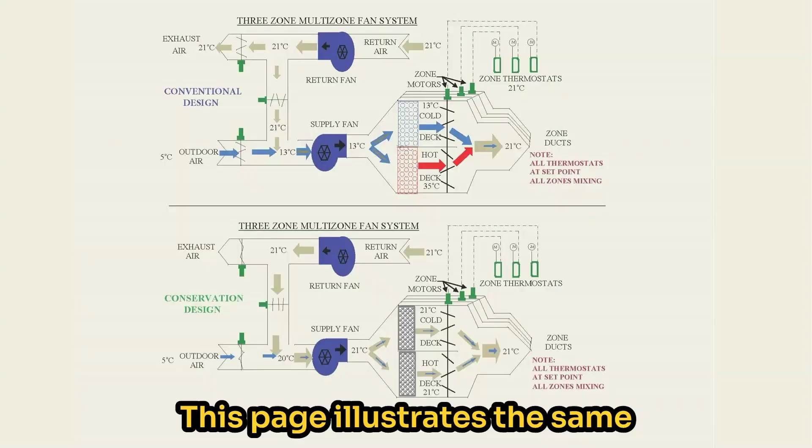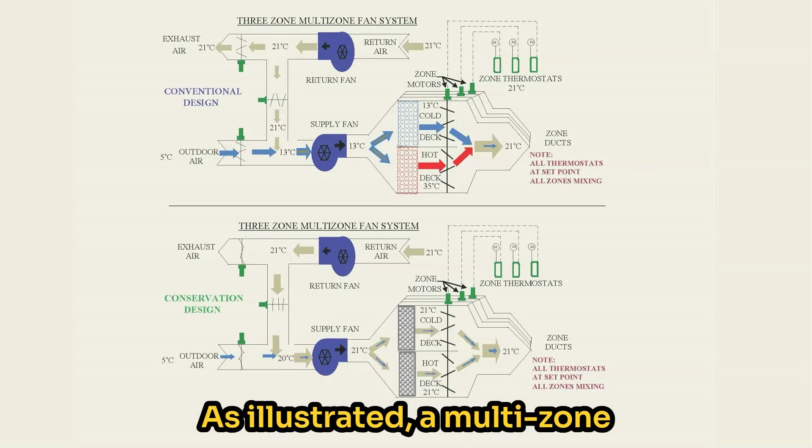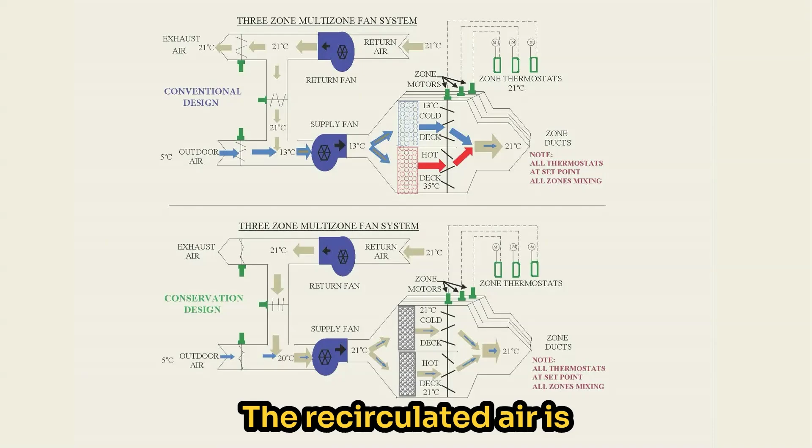This page illustrates the same multi-zone air handling system, with the conventional control design in the upper portion and the conservation design below. As illustrated, a multi-zone system has the ability to draw air back from the occupied space through the return fan. The return air can either be exhausted outdoors through the exhaust damper or partially recirculated. The recirculated air is directed back into the mixing plenum on the suction side of the supply fan, where it is blended with outdoor air.

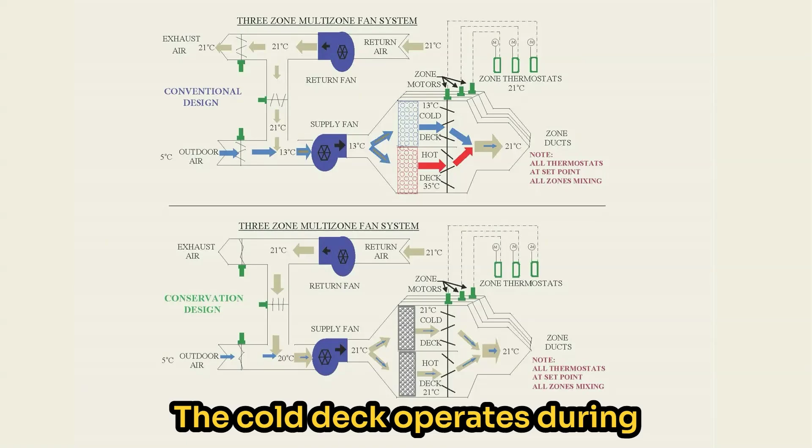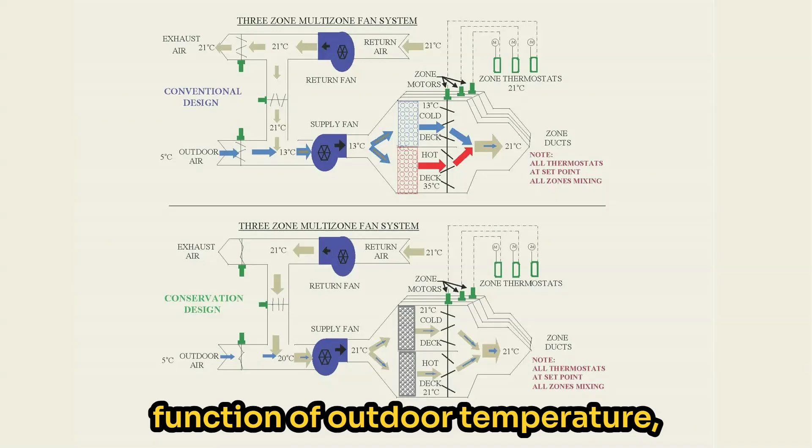In the conventional design, this mixed air is controlled to a fixed 13 degrees Celsius during cold weather, then discharged to the supply of the cold deck and the hot deck. The cold deck operates during summer when mechanical cooling is available, cooling the air to 13 degrees Celsius. The hot deck is activated during wintertime, and its temperature resets directly as a function of outdoor temperature, getting progressively hotter as outdoor conditions become colder.

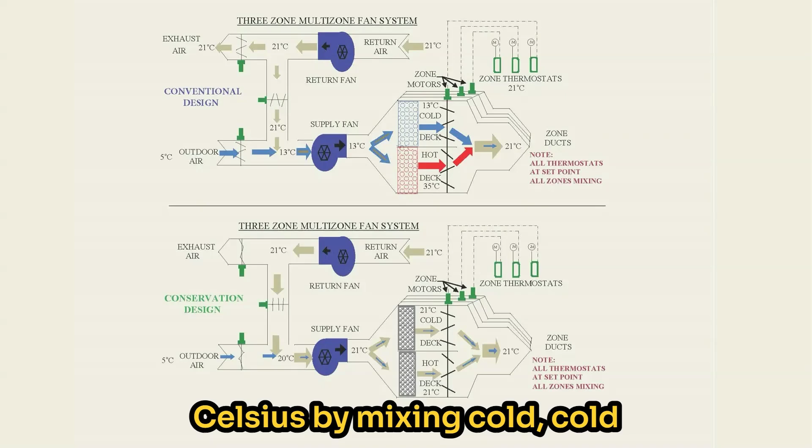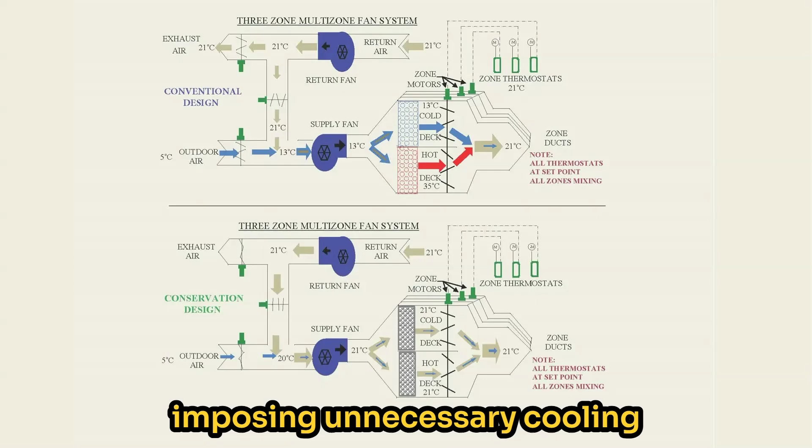At times, satisfied zone thermostats achieve the desired supply temperature, for example 21 degrees Celsius, by mixing cold deck air at 13 degrees Celsius with hot deck air. Ironically, this blended supply air is often delivered at roughly the same temperature as the air being returned by the return fan. In other words, if the system were just left alone without imposing unnecessary cooling from the cold deck or heating from the hot deck, it could have recirculated the return air, added only the minimum required outdoor air for ventilation purposes, and delivered supply air at approximately 21 degrees Celsius with no additional heating or cooling.

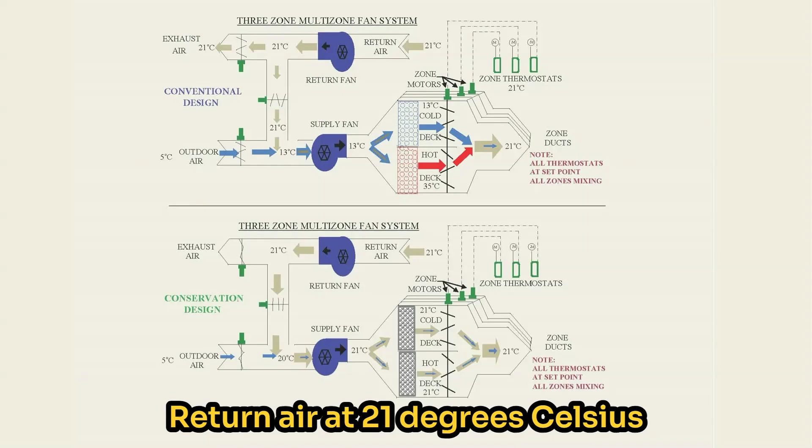The lower illustration presents this more logical control circuit. Return air at 21 degrees Celsius is fully recirculated rather than exhausted, with only the required quantity of outdoor air introduced to satisfy ventilation code requirements. In many cases, though not always, the difference between the supply fan and return fan volumes already equals the minimum outdoor air quantity.

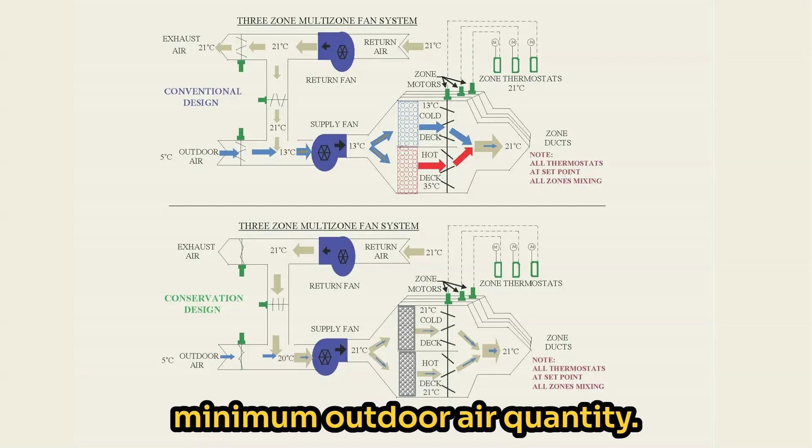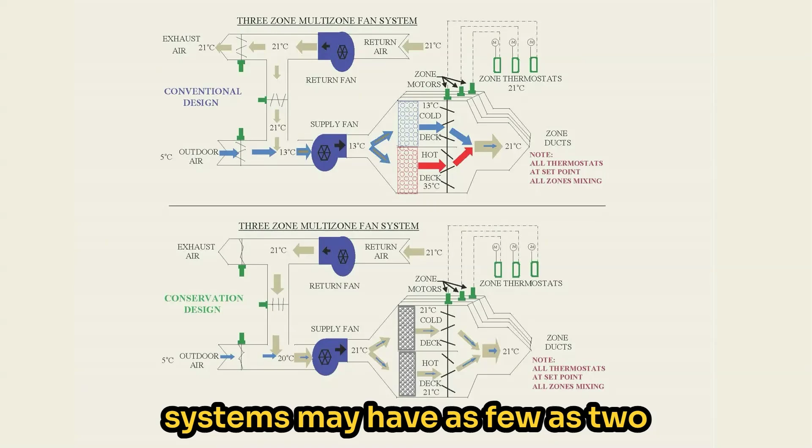The blended air is then discharged from the supply fan at approximately 21 degrees Celsius without the need for artificially cooling the cold deck or excessively heating the hot deck when all zones are satisfied. This example shows only 3 zone thermostats, but multi-zone systems may have as few as 2 or as many as a dozen or more. Regardless of the number of zones, the conventional system is inherently inefficient.

The conservation circuit injects some common sense into the circuit that minimizes the conflict between heating and cooling. The warmest zone can force the cold deck supply temperature downward once that zone has fully closed its hot deck damper and fully opened its cold deck damper.

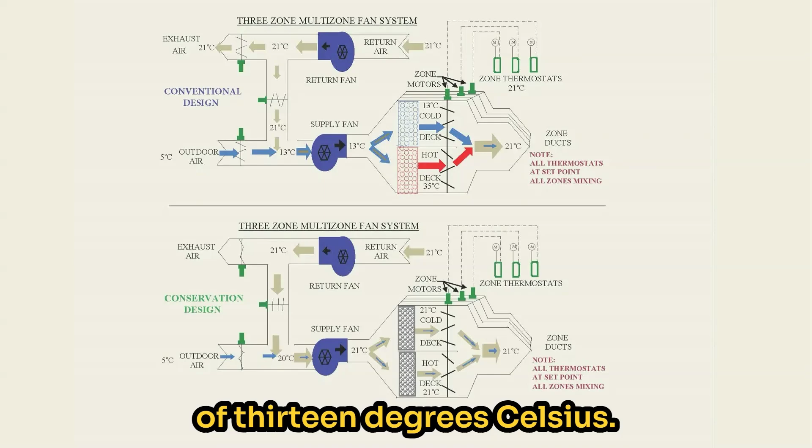The cold deck temperature can only be gradually reduced to the original design limit of 13 degrees Celsius. Conversely, the cold zone can force the hot deck supply temperature upward once its thermostat has fully opened its hot deck damper and fully closed its cold deck damper. The hot deck temperature can only increase within the limits established by the original hot deck reset schedule. This logic tends to minimize the temperature difference between the hot deck and the cold deck on a continual basis.

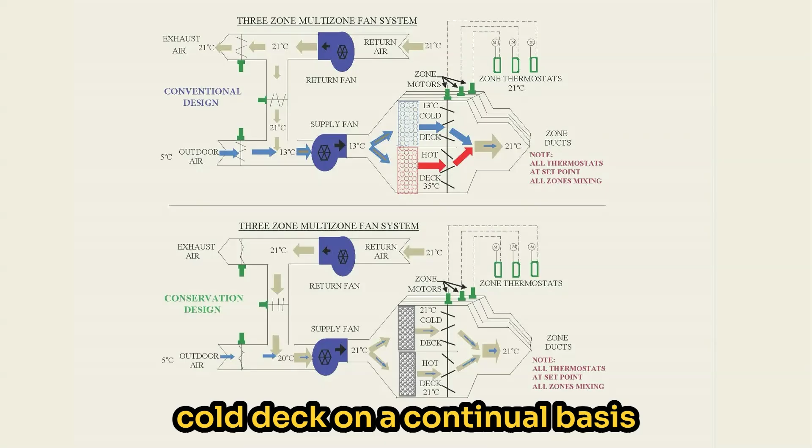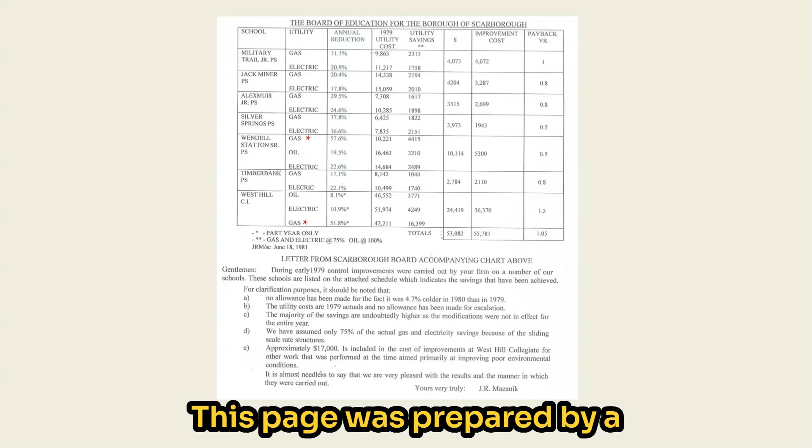The second image is from the Scarborough Board of Education, where their engineer calculated that we reduced energy in 2 of their buildings by more than 50%, and they had multi-zone systems in them. This page was prepared by a manager from the Scarborough Board of Education, indicating the reductions in energy we achieved on buildings that we retrofitted for them.

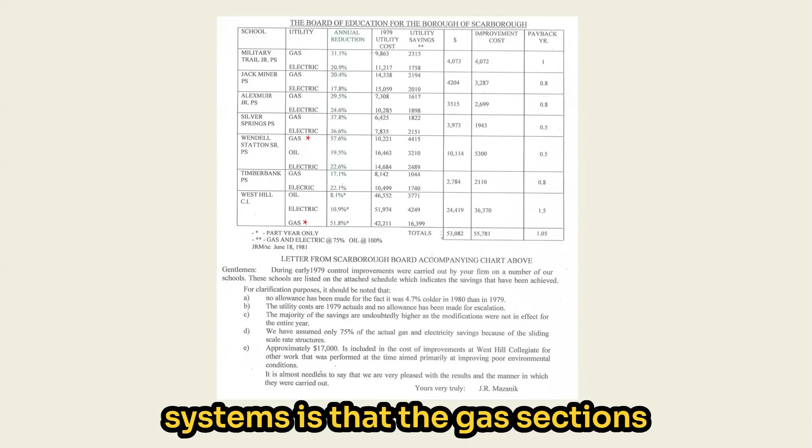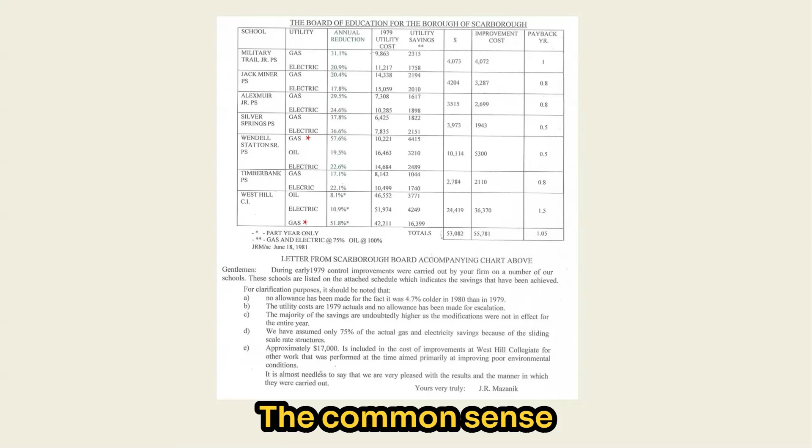The significance of this page with respect to multi-zone systems is that the gas sections of both West Hill Collegiate and Wendell Statton Public School were both gas-driven sections, and we achieved reductions, by their calculations, greater than 50%. The common sense logic of it is just what we used within this video.

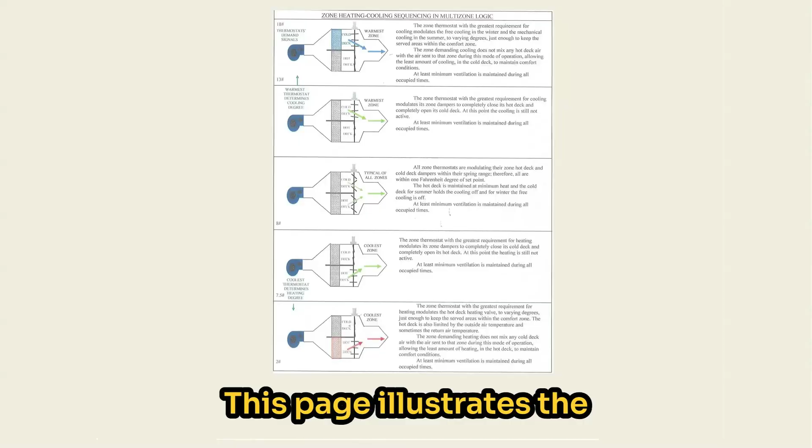The third image we're presenting is the logical staging that a zone has to go through on a multi-zone system. This page illustrates the staging sequence followed by each thermostat in a multi-zone system, ranging from maximum heating demand at 20 degrees Celsius to maximum cooling demand at 24 degrees Celsius.

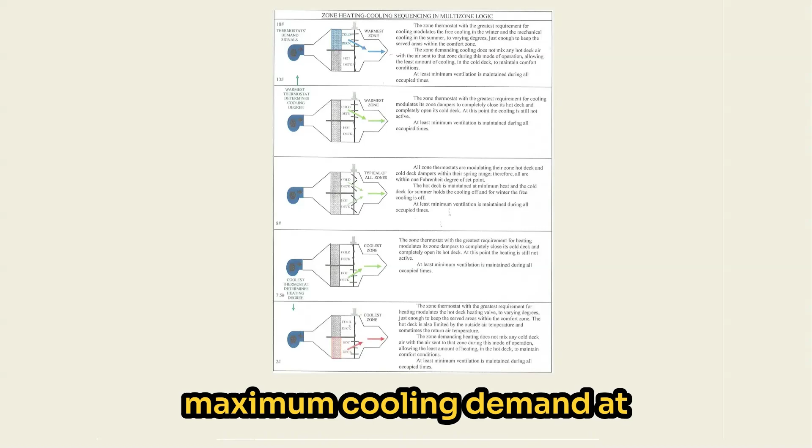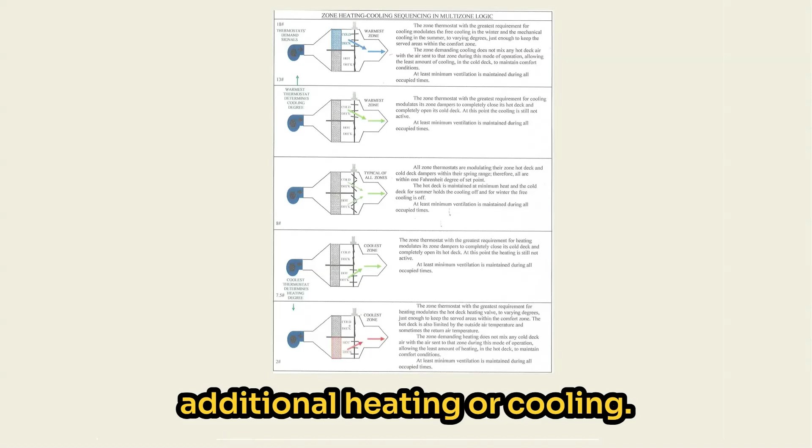When all thermostats are modulating their dampers to blend warm air from the hot deck with cold air from the cold deck, they should remain stable without adding additional heating or cooling. Under these conditions, all zones are operating within approximately half a Celsius degree of their set point, indicating the building is already in balance.

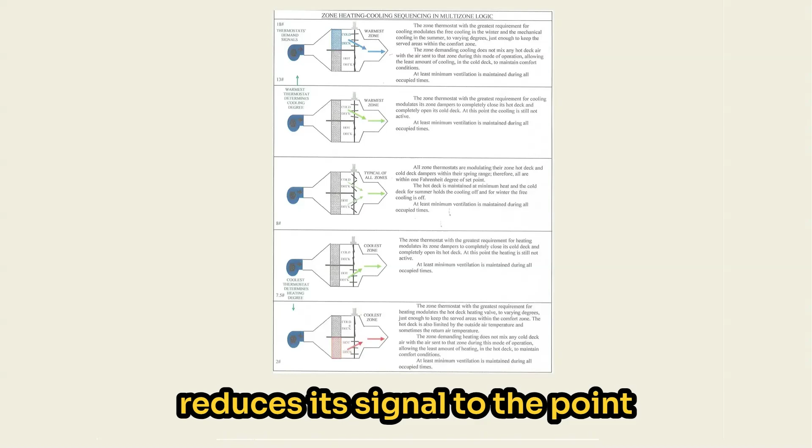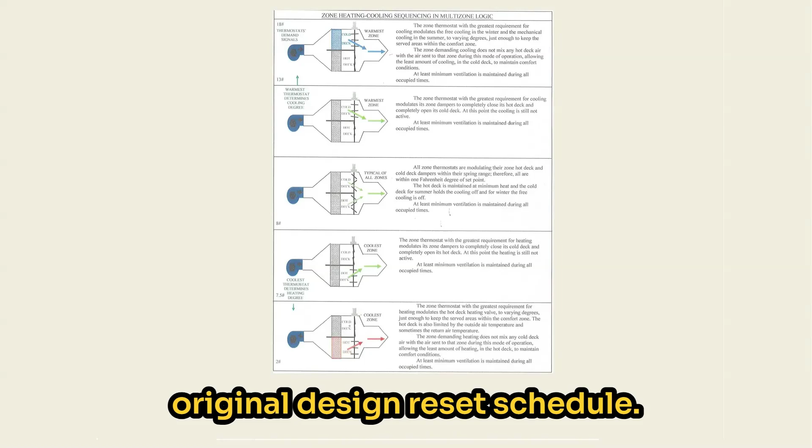If the coolest zone thermostat reduces its signal to the point where its zone dampers are driven to 100% hot deck, any further decrease in its signal is then permitted to stage additional heating. At that point, the hot deck temperature is allowed to increase, limited by the original design reset schedule. Because that zone is no longer blending heated air with cold air, the system can satisfy the space using the minimum possible heat input while maintaining occupant comfort.

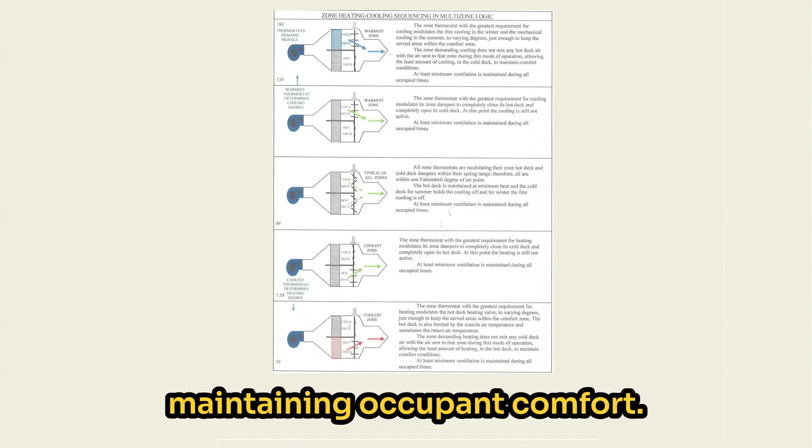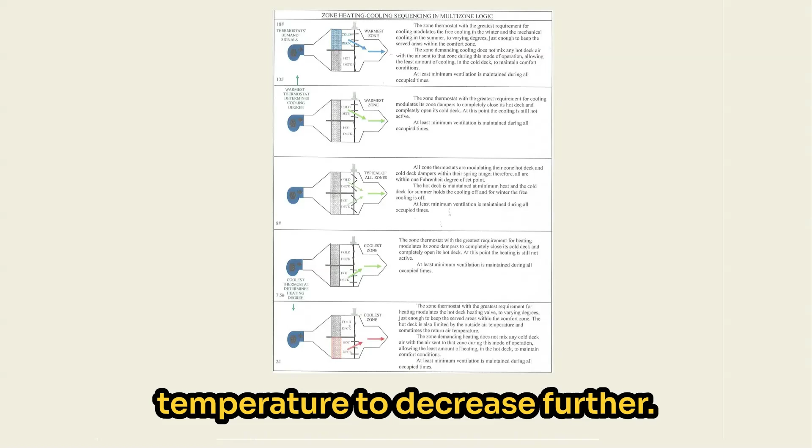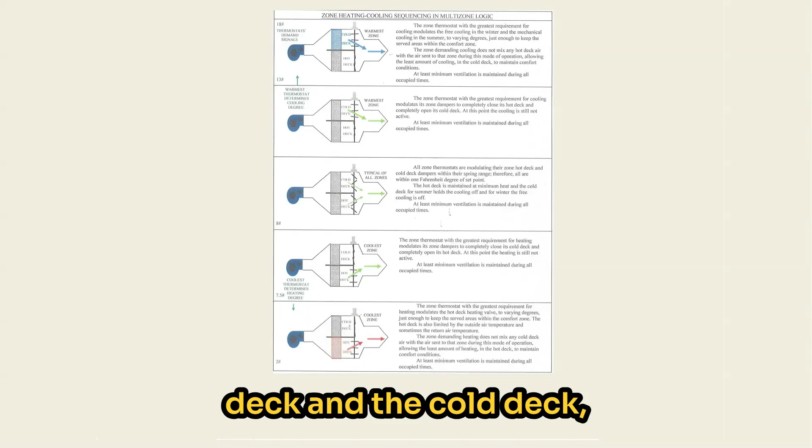At the opposite end of the scale, if the warmest zone thermostat increases its signal as the dampers are at 100% cold deck and the zone temperature continues to rise, the control logic then allows the cold deck temperature to decrease further. This provides only the additional cooling required to maintain that zone within the comfort zone. This control strategy continually minimizes the temperature difference between the hot deck and the cold deck, thereby maximizing overall system energy efficiency.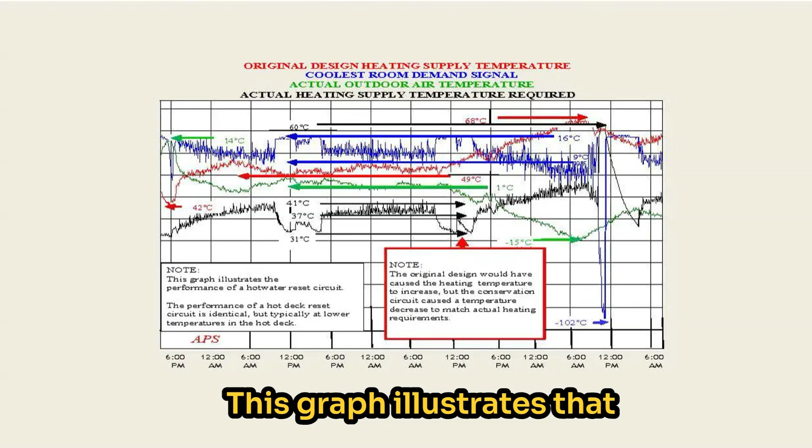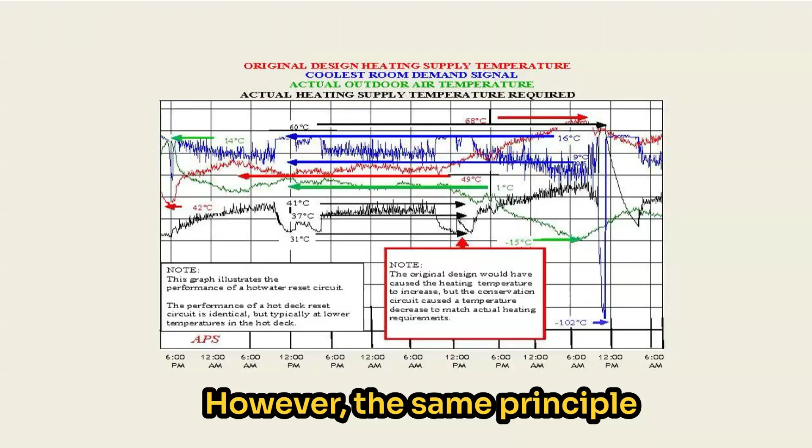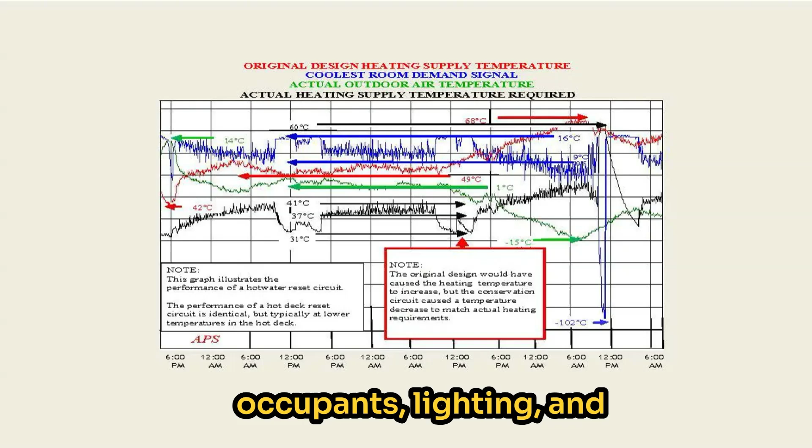This graph illustrates that resetting heating systems based solely on outdoor air temperature neglects a substantial portion of the building's actual heating requirements. In this example, the black line represents hot water heating temperature. However, the same principle applies to hot deck temperatures in multi-zone air handling units. The black line representing actual heating input responds not only to outdoor air conditions, but also to internal heat gains from occupants, lighting, and normal daytime activities.

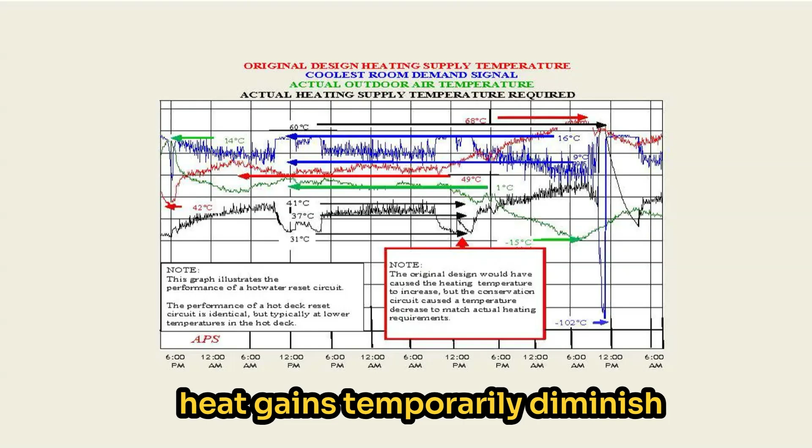As these transient heat sources increase, the requirement for the heating supply system decreases to compensate. Around lunchtime, when internal heat gains temporarily diminish in the coldest zone, the heating supply temperature rises, then decreases again in the afternoon as the internal heat gains return.

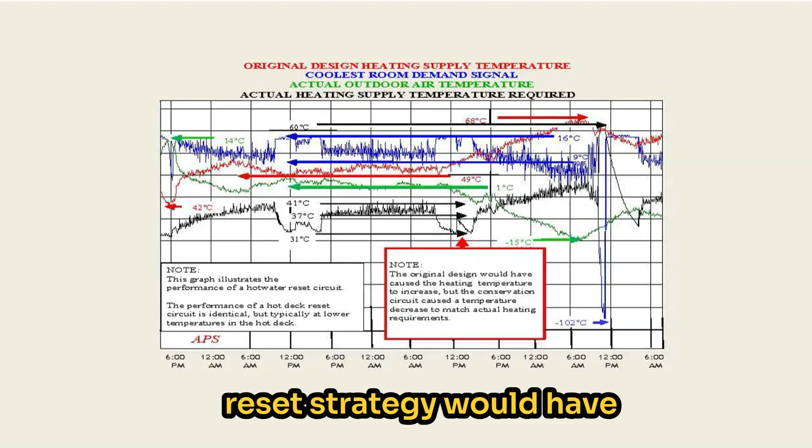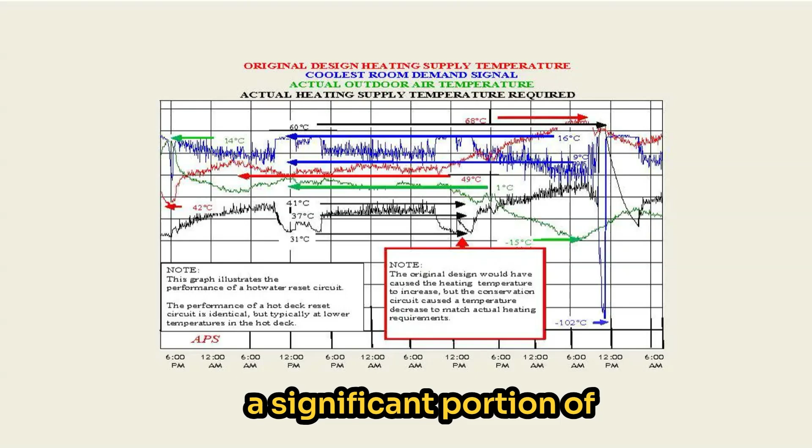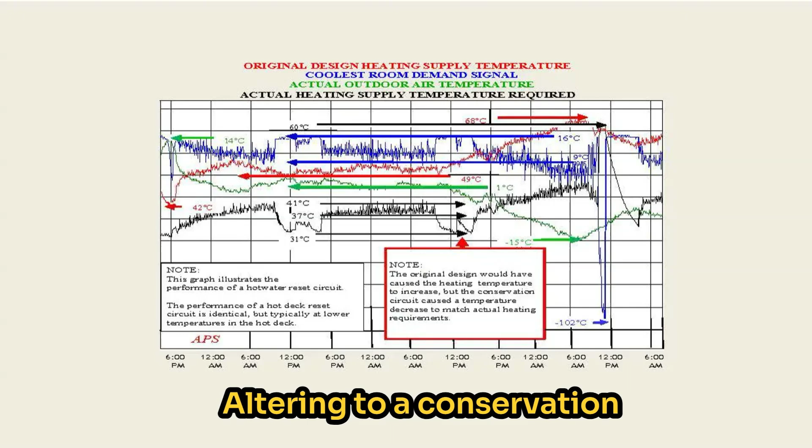On the second day shown, the conventional outdoor reset strategy would have increased the heating supply temperature in response to the falling outdoor conditions. Instead, the heating medium temperature decreased because the internal thermal gains were already satisfying a significant portion of the heating requirement. This provides a practical example of how outdoor air only reset strategies fail to reflect the true heating requirements of a building. Altering to a conservation logic results in improved occupant comfort and significant reduction in energy consumption.

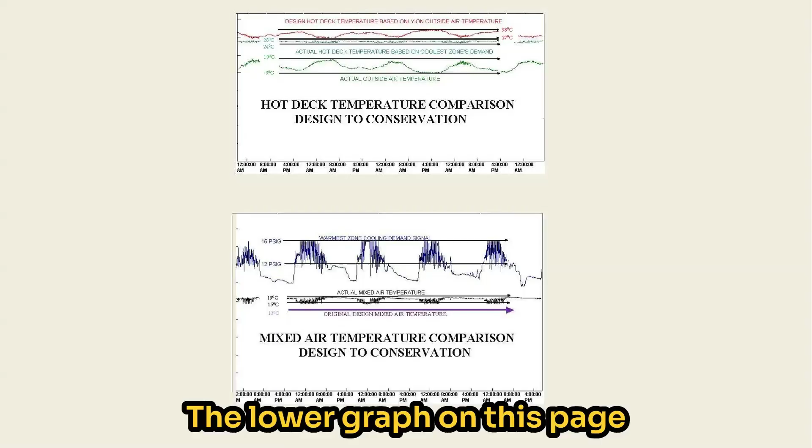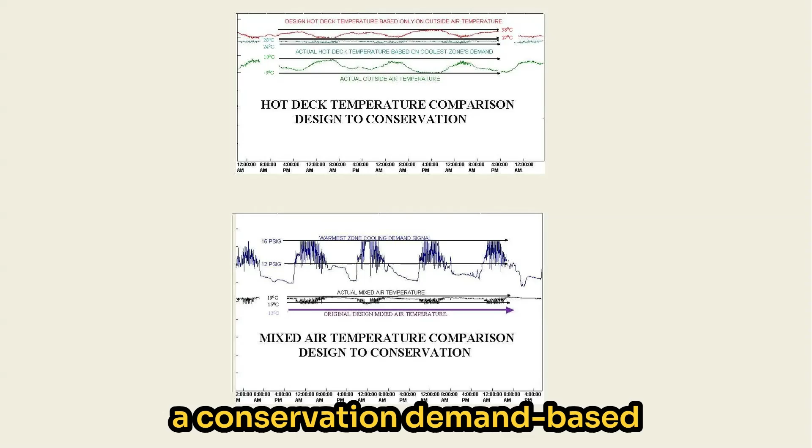The lower graph on this page illustrates the temperature differential between the conventional cold deck design, typically maintained at a constant 13 degrees Celsius, and a conservation demand-based control strategy driven by the actual cooling requirement of the warmest room, after its zone dampers are positioned to not blend hot air with the cold air it's demanding.

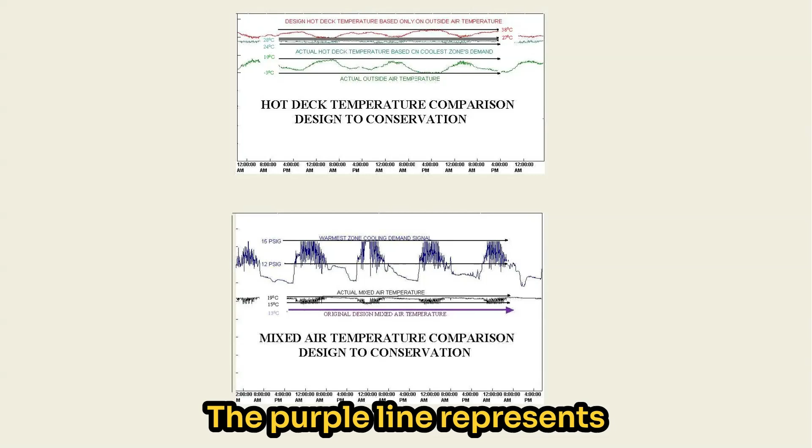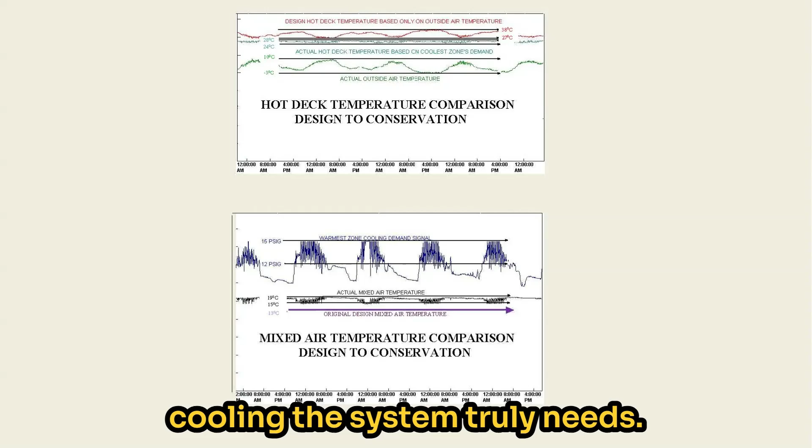The purple line represents the original design cold deck temperature, which is the mixed air temperature in the winter and mechanical cooling in the summer. The blue line shows the control signal from the warmest room, which determines how much cooling the system truly needs. The black line represents the actual cooling requirement, floating between 15 degrees Celsius and 19 degrees Celsius. By allowing the warmest room to control the system, a cold deck temperature is consistently maintained above the original design temperature, avoiding unnecessary overcooling.

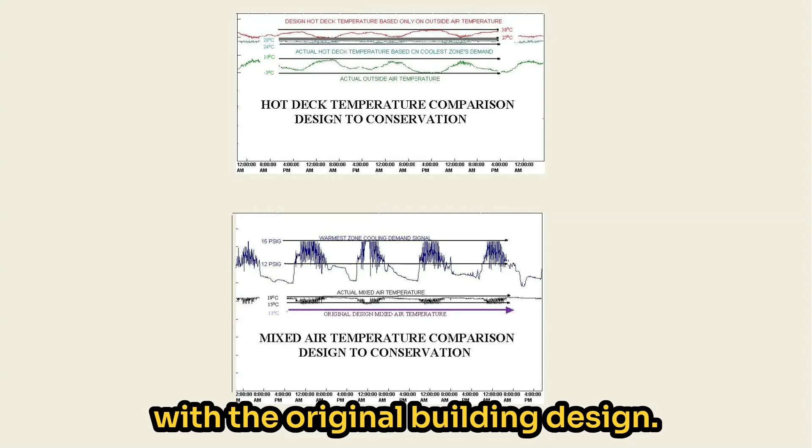The upper graph compares the hot deck temperature under the conservation control strategy with the original building design. The red line shows the original hot deck design temperature based on outdoor temperature, ranging from 27 degrees Celsius to 38 degrees Celsius.

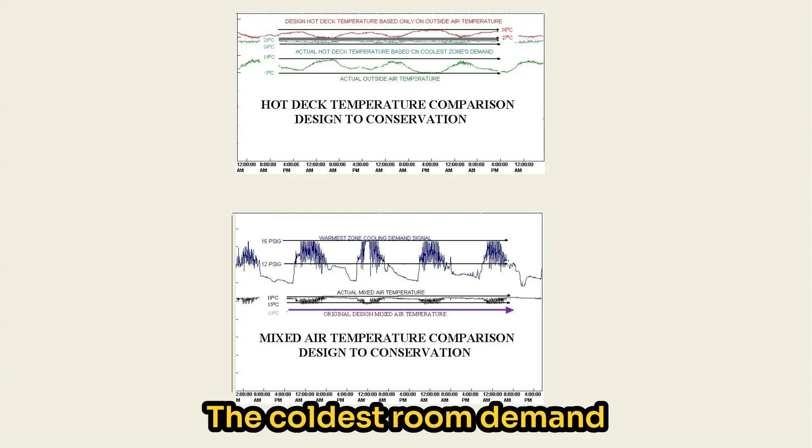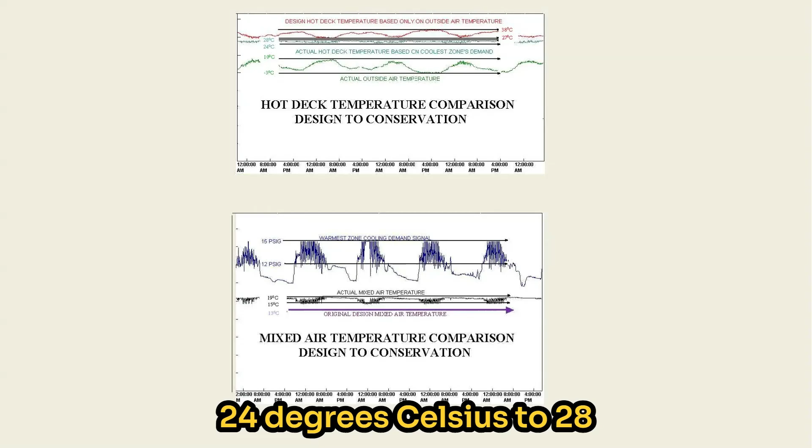The coldest room demand is allowed to control the hot deck after it has positioned its zone dampers to not blend cold air with the hot air that it is demanding. The operating temperature range drops to approximately 24 degrees Celsius to 28 degrees Celsius based on actual heating demand rather than a fixed reset schedule.

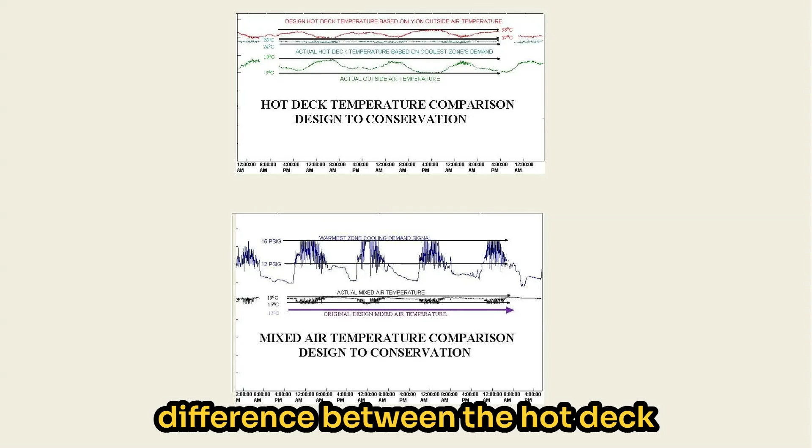Although the hot deck temperature is still limited by the outdoor reset logic, minimizing the temperature difference between the hot deck and the cold deck significantly improves overall energy system performance, reducing both simultaneous heating and cooling and unnecessary energy consumption.

Now, we do have a very serious problem considering the children's well-being in the future. There are two issues. One is the psychological impact of climate change on them, which the BBC presented a survey on a few years ago. And the second issue is the fact that we're going to run out of all fossil fuels within the lifetime of the children. These reports can be seen on our website at apscontrols.org through an article there.